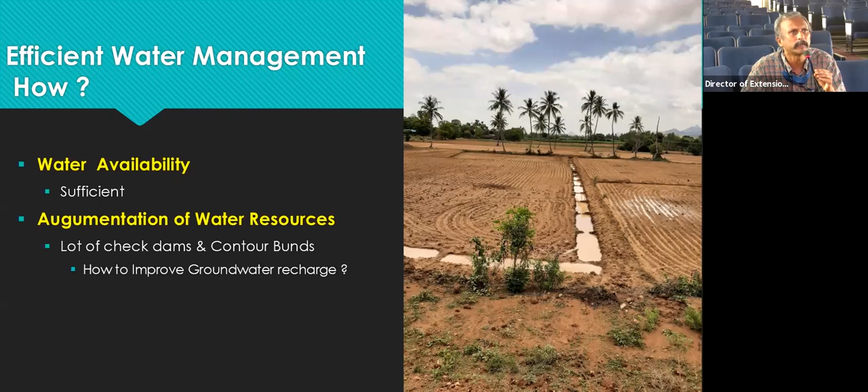Definitely it is not so, because of one very big reason: as soon as a check dam is constructed, initially it will have a very good infiltration capacity. But from the first rain onwards, in the upstream of the check dam, sediments get collected. With every rain, the sediments keep increasing in thickness, and the groundwater recharge potential and capacity gets tremendously reduced.

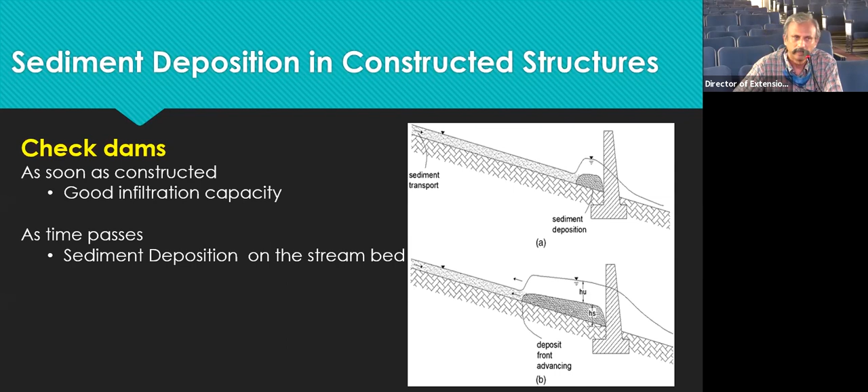In this kind of situation, scientists have found that in order to increase the infiltration capacity upstream of the check dams, we can dig open a trench, something like this in a check dam. If we are able to construct pits like this, then it will be very useful.

These kinds of pits will collect the water, and when water gets poured into these pits, the sediments settle down at the bottom of the pits. The vertical walls will not get sedimented, and through the vertical walls we will be able to have a very good infiltration capacity.

The same kind of principle can also be used in contour bunds. Trenches can be constructed like this, and here we have a vertical wall. Through the vertical wall, the sediments settle at the bottom, and through the vertical wall we are able to have very good infiltration, and groundwater recharge will be better.

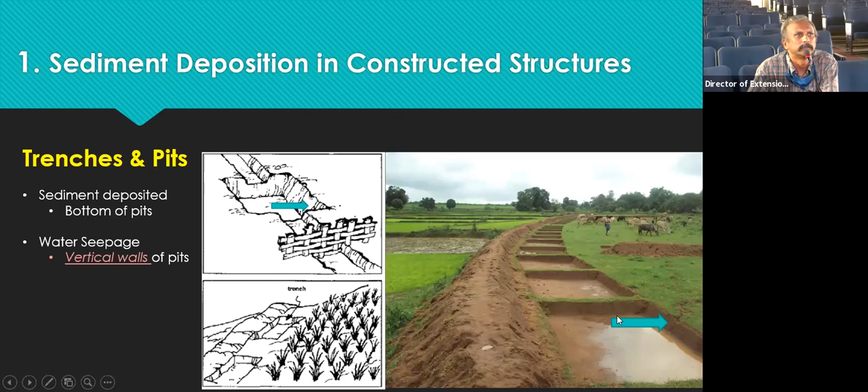As days pass by, the vertical walls of the pits and trenches would get eroded and become flattened like this, and in that situation the infiltration capacity would again get reduced. In order to maintain the verticality of the walls, it is recommended that the pits are filled with locally available gravels and boulders. If we fill them with locally available boulders and gravels, we can maintain the verticality of the walls and get very good groundwater recharge.

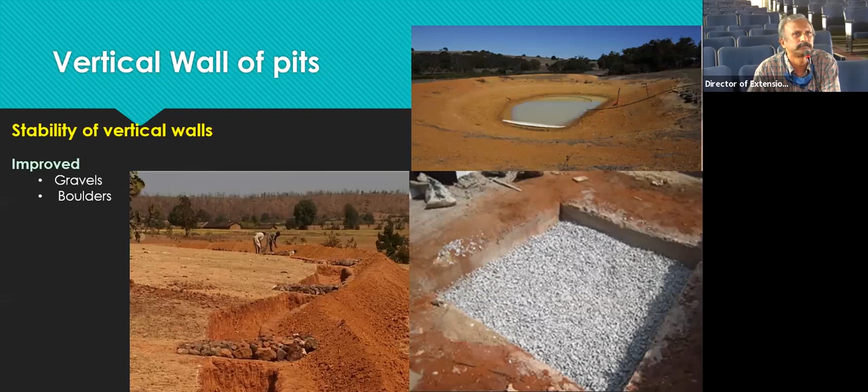In certain situations, wherever possible, in the upstream of the check dams we can fill with gravels like this. When we fill with gravels like this, the sedimentation process occurs over a larger area, and the sediments also settle on the gravels. Since the sedimentation gets distributed, the infiltration capacity of the stream bed will not get reduced very much.

You can also see here, when the bank of the stream is very steep and the soil is also highly erodible, in that kind of situation the geotextiles as seen in the image can be used. In that case, soil erosion can be very much reduced and sedimentation can be prevented.

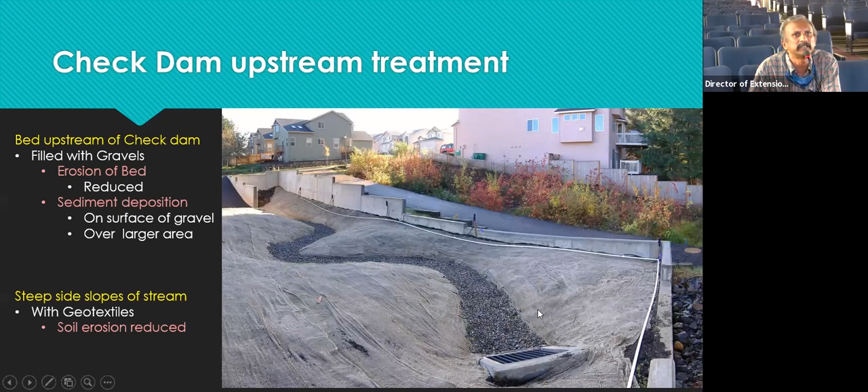Now I will talk specifically about different technologies recommended currently in micro irrigation. The first technology is drip irrigation with oxygation, which means supplying air to the root zone. The next technology is partial root zone drying in drip irrigation. The third is low pressure drip irrigation. And fourth, very interestingly, is crop demand estimation by cell phone. Our ordinary cell phones can be used to estimate crop demand or crop water requirement by downloading an app from Netafim. And lastly, automation. We will see each technology one by one.

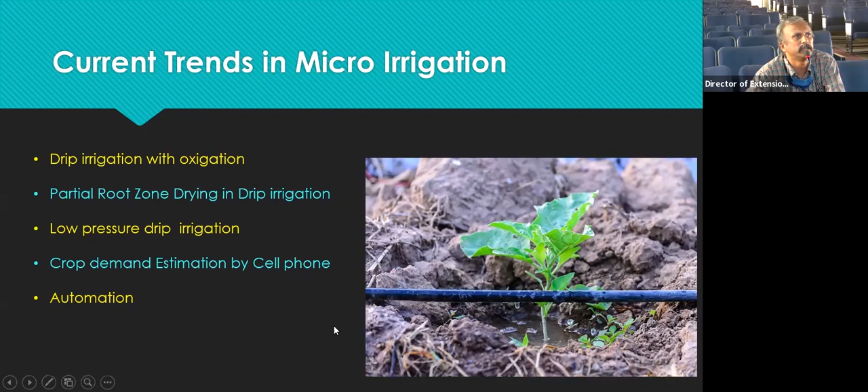In drip irrigation with oxygation, we supply oxygen to the root zone, particularly by using subsurface drip irrigation. Through subsurface drip irrigation, along with the irrigation water, we mix in air and send it to the root zone, and that process is called oxygation.

Because of doing so, what do we get? The crop yield has been found to be significantly increased, and we are able to get earlier harvest, and late season, off-season productions were also made possible. The root mass has been found to be increased, and because of the increased root mass, we get a very good nutrient uptake and nutrient use efficiency.

The microbial activity in the soil gets very much increased, and water use efficiency gets increased, and the salinity tolerance ability of the crop also gets very much increased.

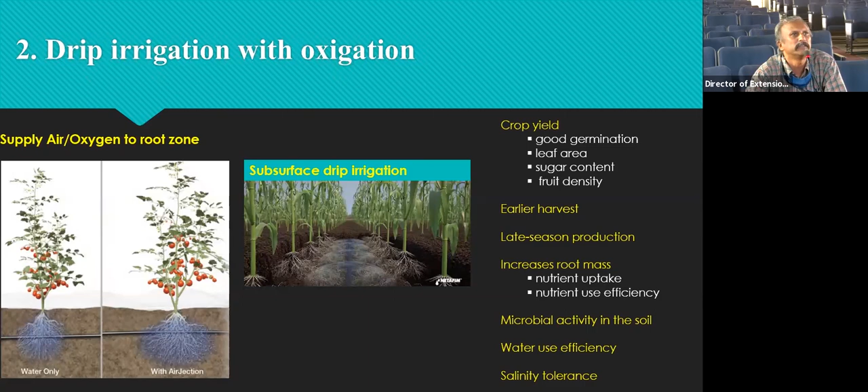So how do we add air or oxygen into the irrigation water? We all know that venturi is the normal accessory that is used for doing fertigation. So that accessory itself can be used for doing oxygation.

When we do oxygation with venturi, what we do is we just pass the water through the venturi, and we do not dip the inlet pipe into the fertilizer solution. We just keep the inlet pipe like this. It should not be placed over the ground. If it is placed over the ground, when water passes through the venturi, the soil particles will also get sucked in, and it will get joined with the stream.

So it should be placed something like this. So when water goes through the venturi, it will take air from the atmosphere, and it will get mixed with the irrigation water, and it will go to the system. Actually, one small problem with this venturi is that the air that gets mixed up with the irrigation water, the size of the bubbles will be larger.

So these bubbles would join together, and that air will get released in the air valves.

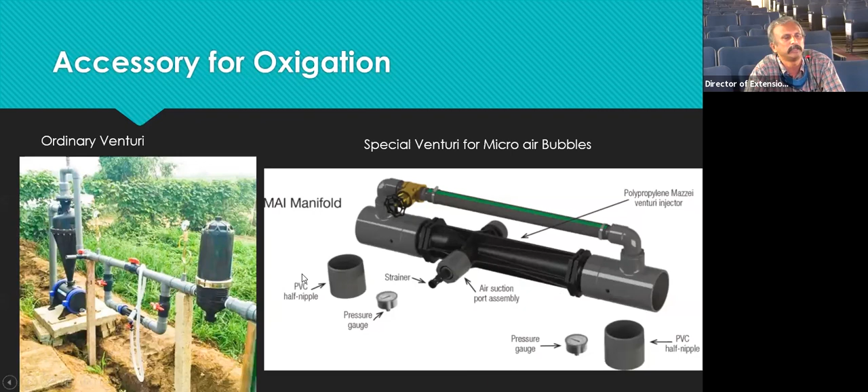And this can be used for oxygation. These two accessories can be used for oxygation. So when a farmer is using oxygation, he should also be a little careful.

In the control head, when we are adding air through the venturi, what will happen is when it goes to the field, for each submain, we will have one air valve that is known to all of us. So all the air we are adding to the irrigation water would get separated through the air valve and released.

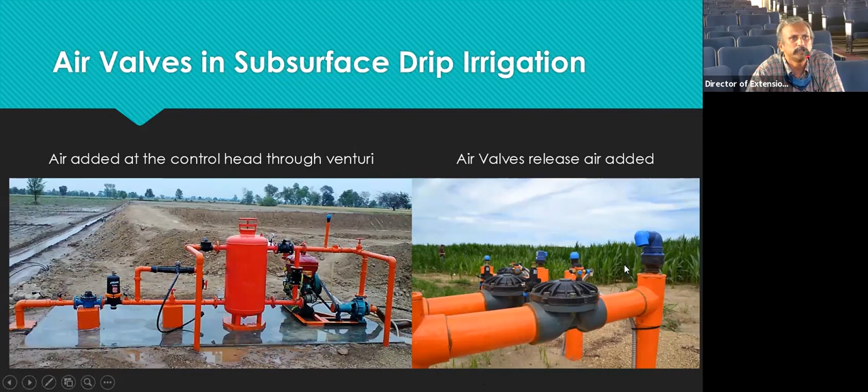So that should be prevented. In order to prevent air from getting released away, we should have the air valves in the flush line. This is the submain. At the end of the submain, in the subsurface drip irrigation, we will have a flush line, that is a PVC pipeline that will be installed. So we have to have our air valves in the flush line only, not in the submain.

If you have air valves in the flush line, what will happen is the air in the irrigation water would get released at this point after passing through the drippers. So that should be kept in mind.

And nowadays, due to the reduction in prices of plastics and so on, people are using this in greenhouses and similar setups. For every lateral also, one can use one venturi, or as seen in this figure, for 2 laterals, one venturi is kept, and when water passes through this venturi, air will be sucked inside and pass into the irrigation water, and oxygenation is done.

And people have found that if we maintain a pressure head loss or pressure head difference between inlet and outlet of the venturi around 5 meters, 0.5 kg between inlet and outlet, it adds up around 12% air by volume of water. This has been found to be sufficient to get a significant increase in yield.

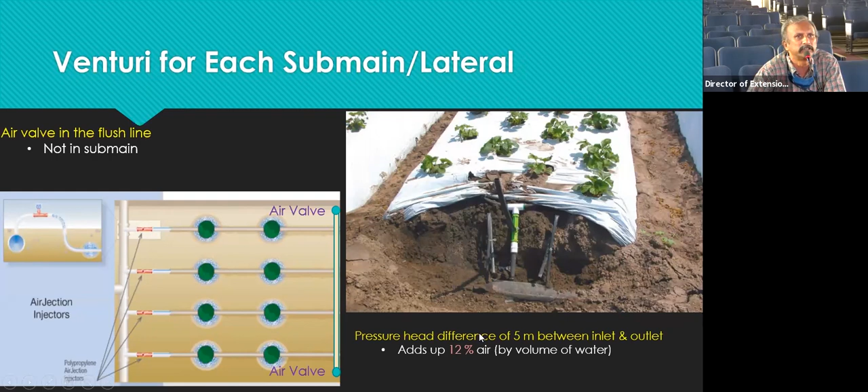Chemical methods can also be used for oxygation. The chemical recommended for doing oxygation is mixing a chemical called hydrogen peroxide with irrigation water. When we mix hydrogen peroxide in irrigation water, the dissolved oxygen in the irrigation water gets improved. And hydrogen peroxide nowadays is also a recommended chemical for removal of algae from drippers and pipes.

We all know that when we take water from surface sources like open wells, we will have a lot of clogging problems. So far, for removal of algae, sodium hypochlorite and calcium hypochlorite, that is bleaching powder, was recommended. Nowadays, for removal of algae, instead of bleaching powder, hydrogen peroxide is very much recommended, because it doesn't cause the environmental problems caused by bleaching powder and chemicals like that.

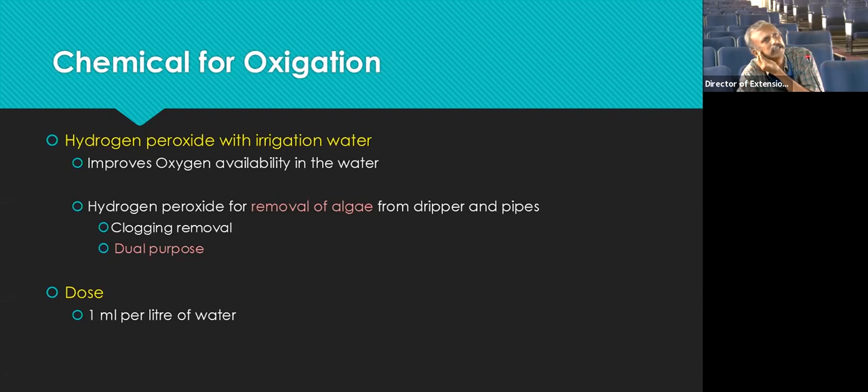So when we are using hydrogen peroxide, we can be sure of two purposes. One is clogging removal, and the other is oxygen availability. The dosage recommended for hydrogen peroxide mixing with irrigation water is 1 milliliter per liter of water. The next technology I will talk about now is partial root zone drying. What did scientists

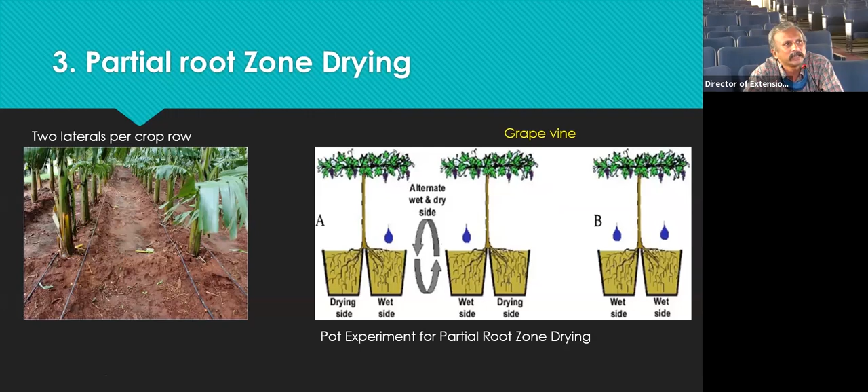So by doing partial root zone drying, what are all the benefits we get? We are able to train the plant to manage stress during drought conditions. It reduces the stomatal conductance. When the stomatal opening gets reduced, transpiration gets reduced. And also because of alternating between sides for irrigation, the nitrogen and phosphorus availability in the root zone gets improved. When nitrogen and phosphorus availability in the root zone gets improved, its uptake also gets improved.

So tremendous advantages have been proved by the scientists, and for almost all crops research is being done, and I am presenting one research result for you to understand. For banana crop, when 1 week was used as the switching interval between sides, scientists found that they could save 50% of water, and there was a yield reduction of only 8%. It should be kept in mind that when we use partial root zone drying, there will be a slight yield reduction, but the saving in water will be very high. So these kinds of methodologies can be recommended in places where water is scarce.

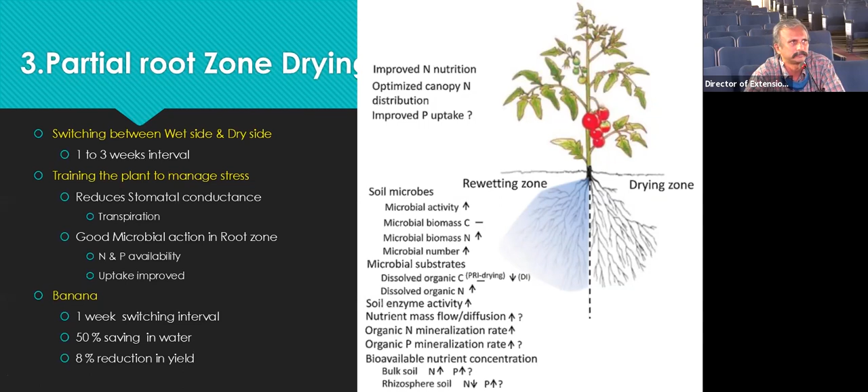The fourth technology we will talk about now is low pressure drip irrigation. Obviously low pressure drip irrigation means it will operate with a very low pressure. From the image you will be able to see that from the tanks itself we will be able to do drip irrigation. Tanks which are placed at a height of only 1 meter from the ground can be very well used in low pressure drip irrigation.

Low pressure drip irrigation can also be used without tanks by directly connecting the pump, but operating with very low pressure. You should also keep in mind that 1 meter of water column is very low pressure, but the normal drip irrigation systems that we are now adopting and recommending use 10 meters of water column.

10 meters of water column is equal to 1 kg pressure. 1 kg pressure is equivalent to 10 meters of water column. Even 1/10 of 1 kg of pressure is sufficient in a low pressure drip irrigation system.

So when one uses a low pressure drip irrigation system, the strength of the pipes and equipment used, and the thickness of the pipe, are all much less, so the cost is very less. Since low pressure is added to the water, power consumed is also less, so the operating cost is less.

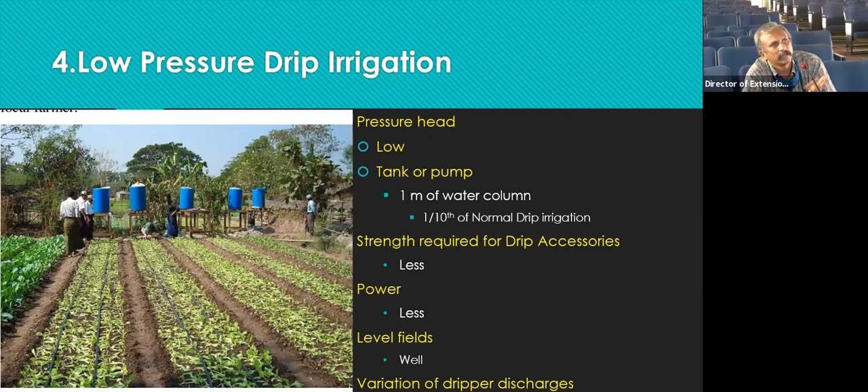And nowadays, solar systems are very much used. So integration of low pressure drip irrigation systems with solar systems is happening. Low pressure drip irrigation systems with solar systems can be very much recommended. And as I already said, in undulating lands, it should not be used.

One more problem with low pressure drip irrigation is clogging, because the water comes out with very low pressure and low velocity. Filtration has to be done carefully. If filtration is not done properly, clogging could be a problem. Wherever possible, larger discharge rate drippers should be used. If you have a 2 liter per hour dripper and a 4 liter per hour dripper, always go for the higher discharge rate dripper, because it will have a larger flow passage. So clogging will not be a problem in that case.

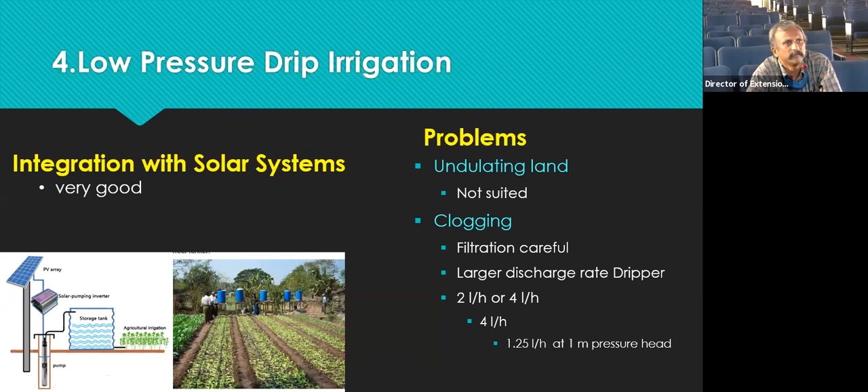Even if you are using a 4 liter per hour dripper, you will be getting only 1.25 liters per hour at 1 meter pressure head. Whenever we say 4 liters per hour, it means that this dripper will deliver 4 liters only when 10 meter pressure head is available at the dripper; otherwise you will get less. So in a low pressure drip irrigation system, even with a 4 liter per hour dripper, you will get very less discharge, but you can increase the irrigation time in order to have sufficient irrigation.

And fifth is the most interesting: a cell phone app for crop demand estimation. This is a very popular and simple formula for estimating evapotranspiration of any crop: ET of the crop is equal to Kc, the crop factor, into ETo. ETo means reference crop evapotranspiration. If we know these two factors, we can find the evapotranspiration of the crop, and then we will be able to irrigate that much.

The reference crop evapotranspiration is for a standard grass. To find it in foreign countries, farmers own meteorological stations; they measure wind speed, humidity, temperature and so on, and based on that calculate the evapotranspiration. But our farmers did not use this method, since it was not affordable or easy. Nowadays, remote sensing technology has improved to such an extent that you don't need a meteorological station in the farmer's field.

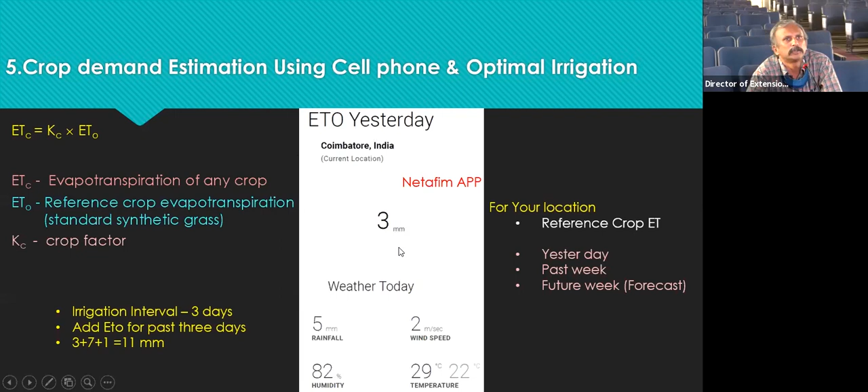And people are using this app around the world very well. Even in Tamil Nadu, many people are already using it. So this can be popularized among the farmers in order to improve optimal irrigation.

We should also know what is the minimum irrigation duration for row crops in drip irrigation. So in case of row crops, we adopt inline laterals. When inline laterals are used and a dripper is operated, the wetted circles would get formed like this. These wetted circles have to join together, and until that time irrigation should be done. We should get a continuous wetted strip, something like this. Only then irrigation should be stopped. This is called minimum irrigation duration.

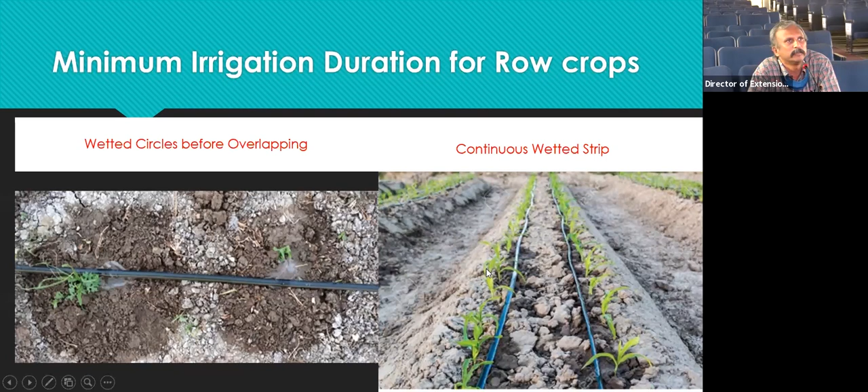When one lateral is used for 2 rows, irrigation should be sufficiently done to wet until the 2 rows of the crops. Sometimes for a single lateral we use 4 crop rows, even 5 also. So the minimum irrigation time should be such that the entire width gets wetted. So it is an easy job to know how minimum irrigation duration should be found.

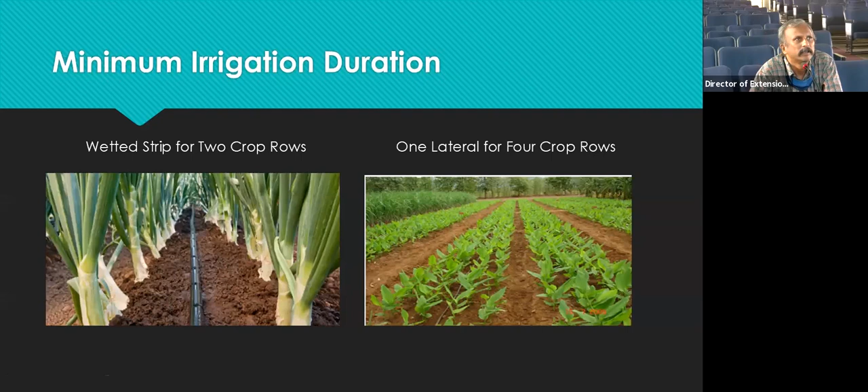But the maximum duration of irrigation is very important, and that should be known by the farmer. For finding maximum duration of irrigation, a farmer has to do a little field work. He should dig a small pit at the end of any lateral, at any place in the field. And if you look here, the dripper from the wall of the pit should be at half the normal spacing. Let us assume that the normal spacing between the drippers is 40 centimeter, half spacing is 20 centimeter. The dripper should be placed at 20 centimeter from the wall, and it should be operated.

And you should find out the time taken for the wetting front to reach the maximum rooting depth. That is the time until which you can do the maximum irrigation. If you irrigate beyond that time, you will be irrigating below the crop root zone. Then not only will you be wasting the water, all the nutrients you are adding with the irrigation water would get leached away, and you will not get the full benefit of using drip irrigation.

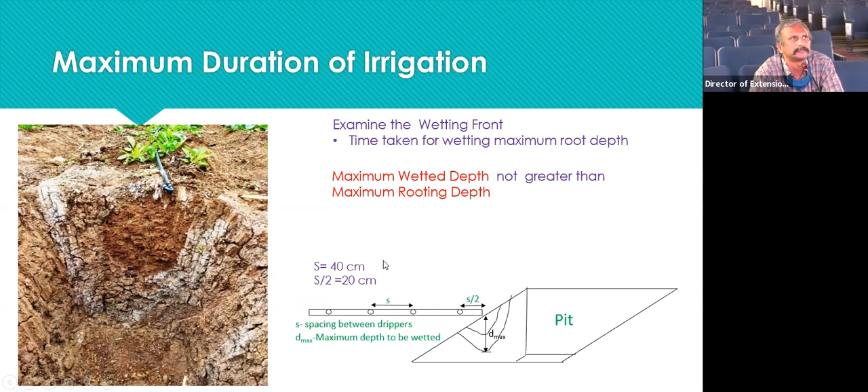Next we see drip irrigation for coconut. Scientists have found that for coconut, the most active roots which take water are at 1 to 1.5 meters from the trunk of the plant. So if we are able to make a trench like this and have our drippers discharging water only in the trench, then we will be using the water optimally and efficiently.

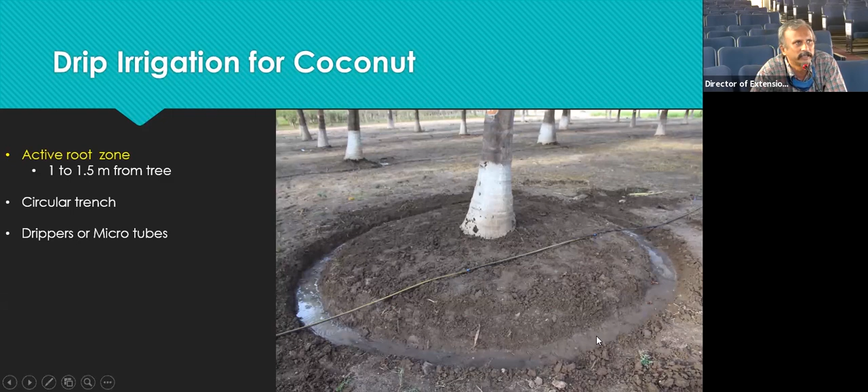Even some farmers who use tap can allow the water to get stagnated only in this trench. Then they will not be wasting too much water, and in this trench they can also place coir pith and organic mulches and things like that, and optimally manage the water for coconut.

Finally, I will introduce the technologies that are popularly used under automation of irrigation systems. What is automation of irrigation systems? It is operation of irrigation with minimum manual intervention. With minimum manual intervention, we can do irrigation nowadays. We can automate valves, pumps on and off can be done, fertigation can be done, filter washing can be automatically done. All these are possible with the improvement in electronics and computer technology.

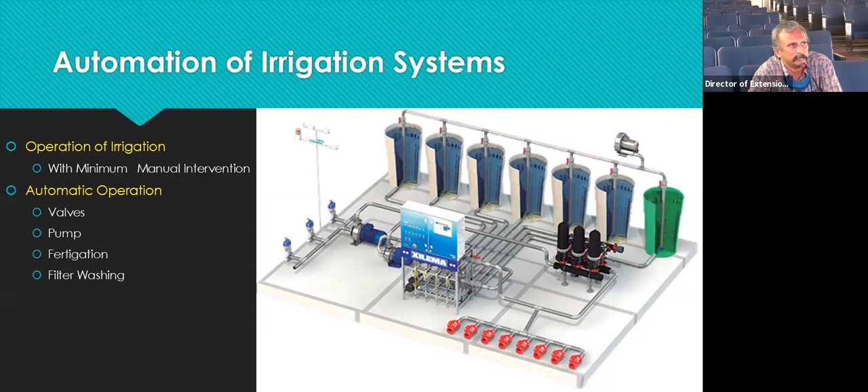Nowadays, with advanced automated fertigation systems, we find many channels, many tanks, in which for nitrogen a separate tank, for phosphorus a separate tank, for potash a separate tank, and micronutrients can be placed in a separate tank. Around 5 tanks can be placed, and the automated instrument will be able to take fertilizer solution in precisely measured quantities, and it will get injected into the irrigation water.

During that process, the electrical conductivity and pH can also be maintained by mixing with the acid. The pH can be maintained to a level around 5.5 and all will be optimal. These kinds of systems are very much used nowadays in greenhouses. Filter backwashing, as I already said, can be done with this kind of system.

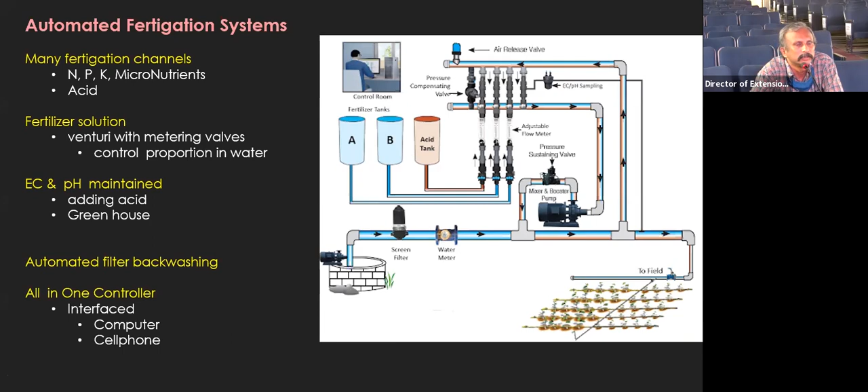All this automation is done by a single controller, and this controller gets interfaced with a computer, and the computer can also be interfaced with your cell phone. Since it can be interfaced with the cell phone, all this automation can be monitored, and commands can also be given from the cell phone. Those kinds of developments have occurred.

If you look at the irrigation valves in automation systems, irrigation valves will be in the field, while the controller and control head will be too far. If you want to control the irrigation valves in the field, we have to connect them with wires, and it is very difficult and a tedious process. Nowadays technology has grown for this also, and remote controlled valves from the control head have come.

There will be a remote terminal unit, and that remote terminal unit will be powered by a solar system itself. This is a remote controller, and this remote controller gets its instruction through radio waves from the controller. Here we have a radio wave receiver. So these kinds of systems have also come. These are all the most advanced systems available in the market now.

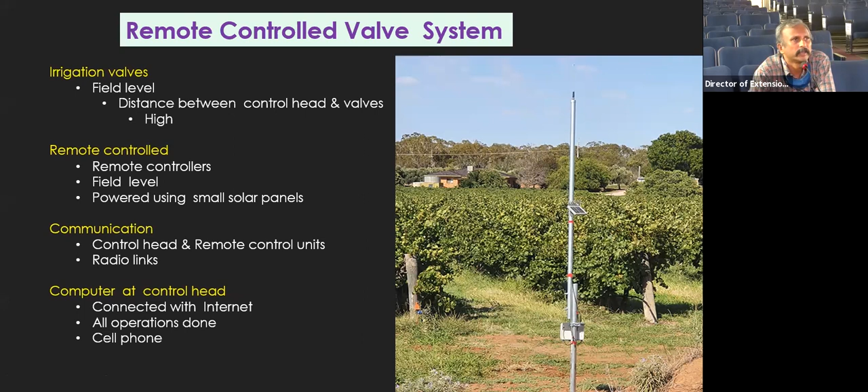Now I will introduce a few components in automation, so that when you look in the field, when people talk with you regarding automation, you will be able to understand what the technical person is talking about. All automation equipment will have a relay circuit.

All automation systems will have a simple relay circuit. In this, if you see, this is called the main circuit. In this main circuit, there is an AC motor, and this motor is connected with power, and this part is called the relay. This relay has a switching mechanism, and when this switch is put on, the AC motor will run. And here, this is called the relay circuit, and this relay circuit is also connected to this relay.

In this relay you are able to see one power source. The power source can be DC or AC. If DC is used, 12 volt DC will normally be used. If AC is used, 25 volt AC will be used using a transformer. You should keep in mind that this relay circuit works with low voltage. It will not cause any kind of electric shock at all.

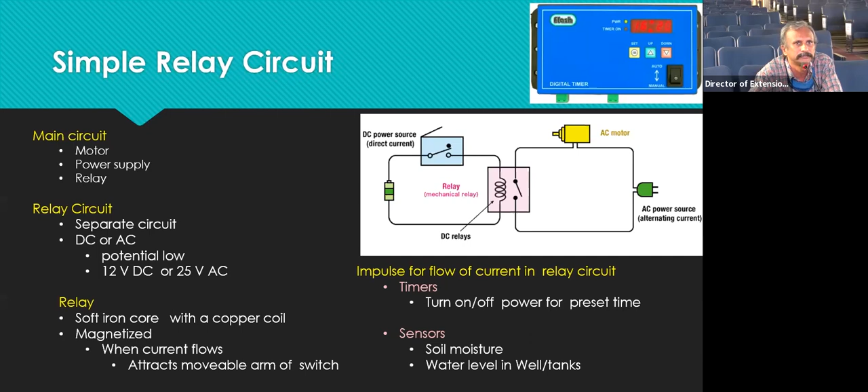One very big disadvantage of the electromechanical relay is that it has to move. Wherever there is movement like this, there will be wear and tear. Also, since high voltage current is passing through this circuit, when switching on and off an electric arc will be produced. Electric arc means high temperature. Because of high temperature, the contacts will get oxidized, and it will fail within a short time.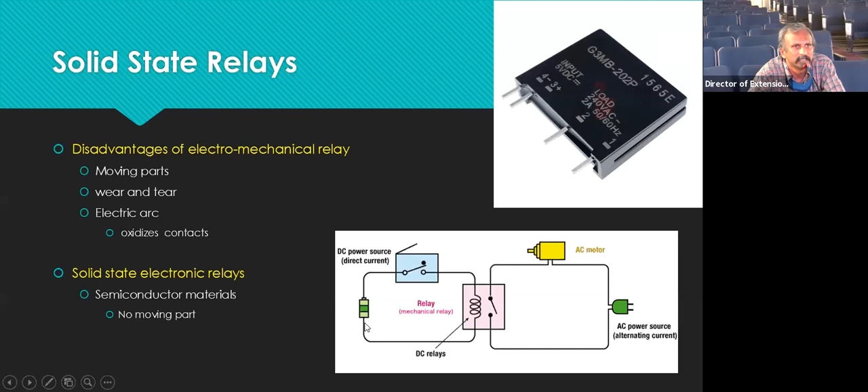So nowadays people have developed the solid state relay. Instead of electromechanical relays, solid state relays are used. In the solid state relay, you see four terminals, two here and two here. This can be placed here. Solid state relays are made of electronic, semiconductor materials, and there is no moving part inside, but it does the same process as the electromechanical relay. In many places, solid state relays are used.

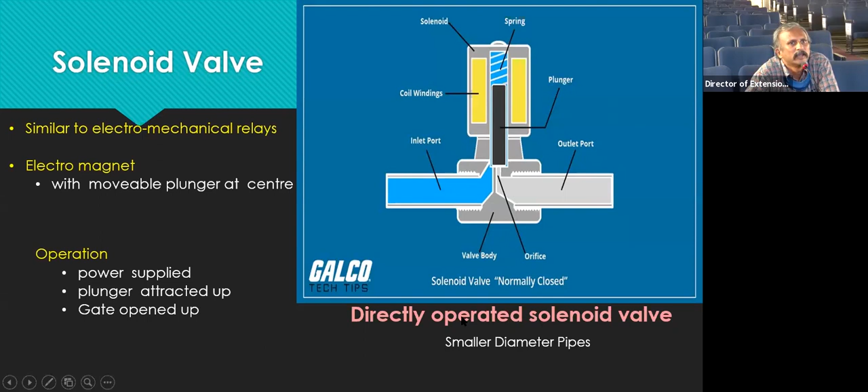When the solenoid valve is directly fitted with the pipeline, it is called a directly operated solenoid valve. Directly operated solenoid valves are used for smaller diameter pipes. In irrigation, this is one controller for one directly operated solenoid valve. This controller will control only one solenoid valve, and its operation can be easily programmed, such as on which days and for how long irrigation should be done. For instance, on Monday and Thursday, 8 a.m. to 10 a.m. irrigation must be done. If you program it like that, it will do it for you.

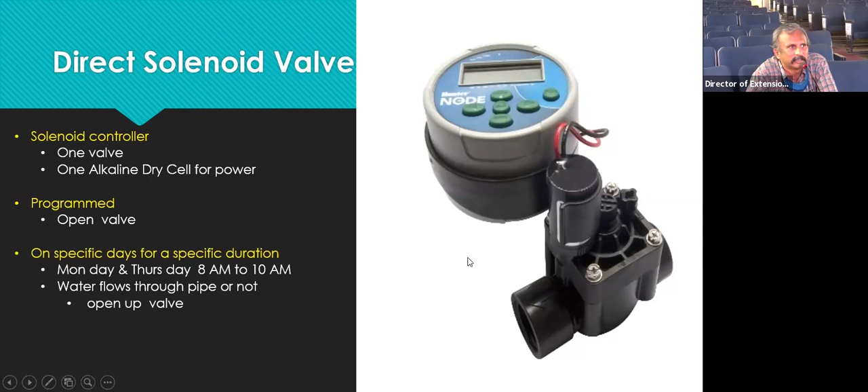But in this system, it doesn't care whether water goes through the pipe or not. On Monday and Thursday, 8 a.m. to 10 a.m., it will be opened regardless. So that is how these controllers work. As far as irrigation in farmer fields is concerned, directly operated solenoid valves are not much used. Only pilot operated solenoid valves are used.

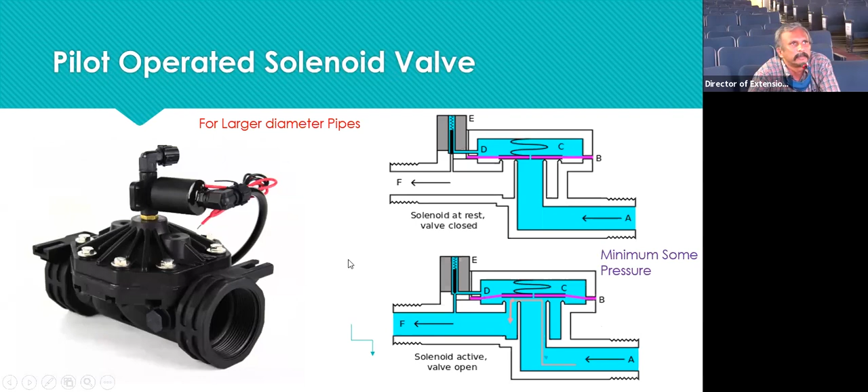So in order to operate these kind of valves, we need minimum pressure. Some pressure has to be there. Only then these valves will be opened, because only then it will be able to lift the diaphragm. So these valves, if you look in the field, many people would have used. They are called pilot operated solenoid valves.

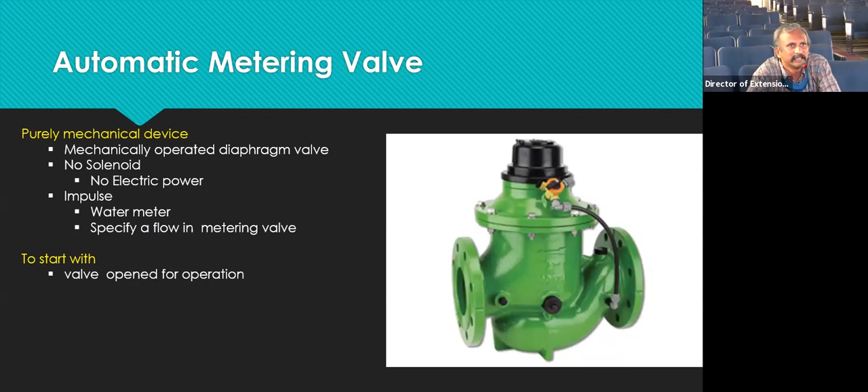So these kinds of automatic valves are standalone valves. They will operate only one valve at a time. So if we use overhead tanks, and if you operate these single valves with this kind of methodology, there will not be any problem. Even if all valves are closed, there will not be any pressure increase and pipe bursting and all will not happen. But in real situations, pumps exist in water line.

So if all the valves are closed, there will be possibility of bursting of pipes. So we need to go for higher technology level, and nowadays intelligent controllers are used. When all valves are closed, it will check up. If all valves are closed, it will automatically close the motor power supply also.

When one valve is opened, during that time, if the motor is not started also, then also problem. So when a valve is opened, it will also check up whether motor is running or not. If the motor is not running, it will also open up the motor.

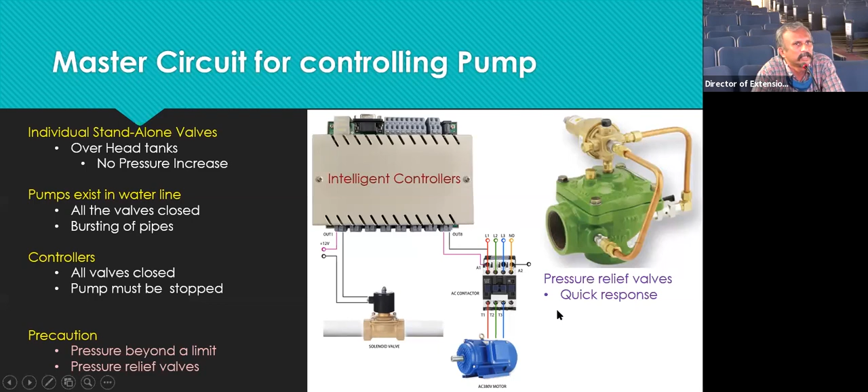So in case of automation, one more thing, pressure relief valves are also very much used. Sometimes if pressure goes beyond limit, the pressure relief valves will automatically open up and relieve the pressure, and they will have a quick response and things like that. These kind of valves are also used.

And we will see pressure management valves. There are two valves, pressure reducing valve and pressure sustaining valve. The pressure reducing valve will maintain a downstream pressure, whatever be the upstream condition. For a design pressure, let us say 1 kSc or 2 kSc, you don't need to operate this valve every time and adjust to get a design pressure. If you install this valve, this will automatically maintain a downstream pressure. That valve also does not need any electric power or electric controller and things like that.

There is another valve called pressure sustaining valve. Pressure sustaining valve will maintain upstream pressure. Whatever be the downstream pressure, it does not look into the downstream at all. It will look only at the upstream and the upstream pressure.

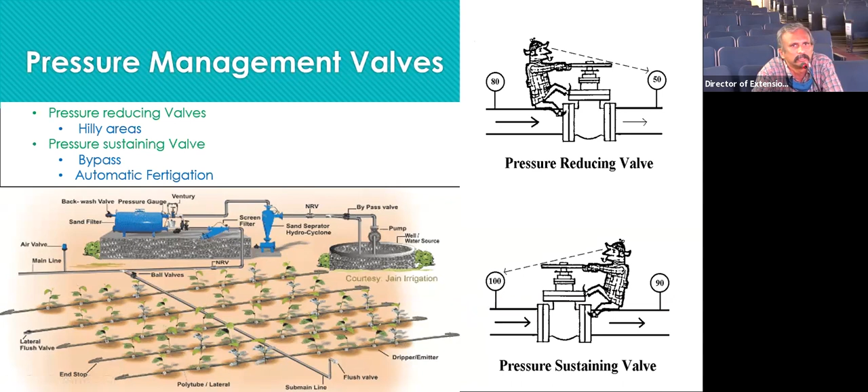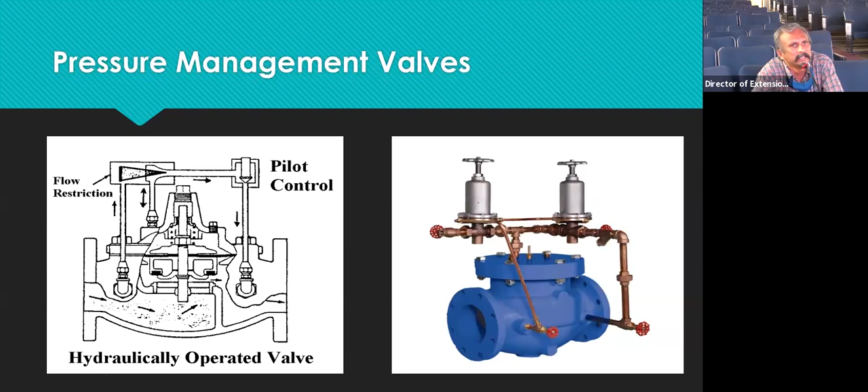This is a pressure management valve. Both pressure reducing valves and pressure sustaining valves look the same, but their operation is different. It will have two knobs. If you adjust these two knobs for your situation and fit it, you can forget it, and it will keep working to maintain the designed pressure either upstream or downstream.

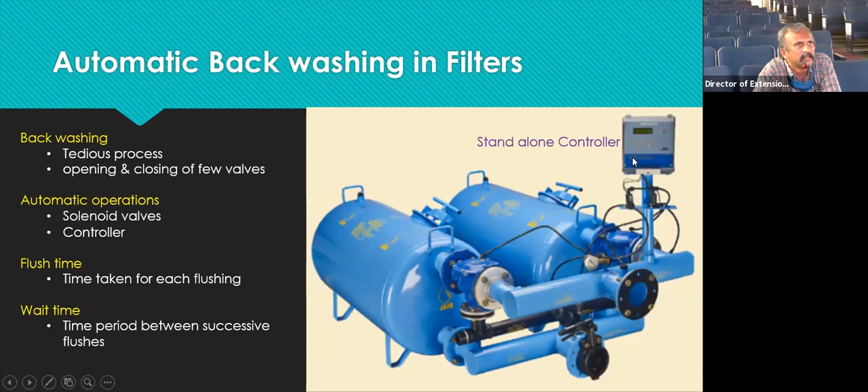As I said, automatic backwashing in filters is made possible by having a separate controller. The separate controller manages the solenoid valves, and here we can program for each flushing how much time the flushing operation should take, and at what time interval the next flushing should be done. These standalone controllers are also available in the market.

Lastly, soil moisture sensors are also used for automation. Four soil moisture sensors are normally used: the tensiometer, the resistivity sensor, and capacitance and time domain reflectometry sensors. The tensiometer and resistivity sensors are very much used because of their low cost. Capacitance and time domain reflectometry sensors are also used; they are very good and accurate, but since they are costly, most farmers do not use them. At present, these sensors are used only in research.

With tensiometer and resistivity sensors, you get data regarding soil moisture tension. If that kind of data is available to the farmer, it is very advantageous, in the sense the farmer does not need to consider what kind of soil the crop is grown in. For example, for sugarcane, if the optimal soil moisture tension data is 500 centimeters, irrigation should be done when that level is reached, whether the crop is grown in sand, loam, or clay. So that is the biggest advantage of soil moisture tension research data.

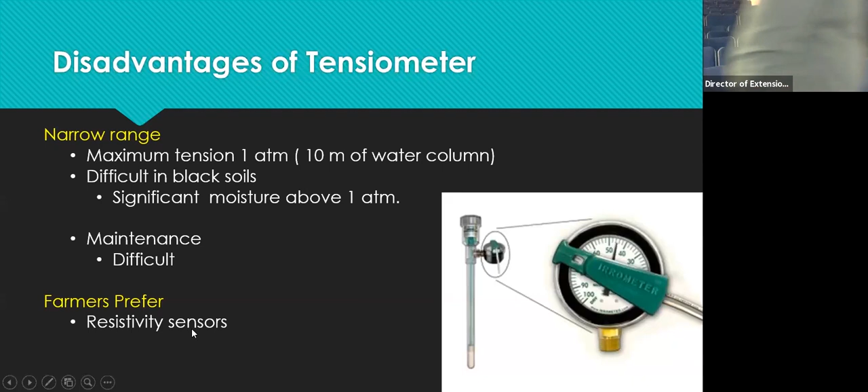The characteristic of resistivity sensors is that the resistance between electrodes is measured. Resistivity and soil moisture tension are proportional, so if you measure resistivity, you can estimate soil moisture. One disadvantage of resistivity sensors is that if the contact area between soil and sensor varies, resistance and resistivity will also vary. There are also possibilities of air pockets forming between electrodes and soil, which affects observations. Also, in saline soils and during fertigation, the ionic atmosphere in the soil affects resistivity, which also affects observations. These are some of the disadvantages of the resistance sensor.

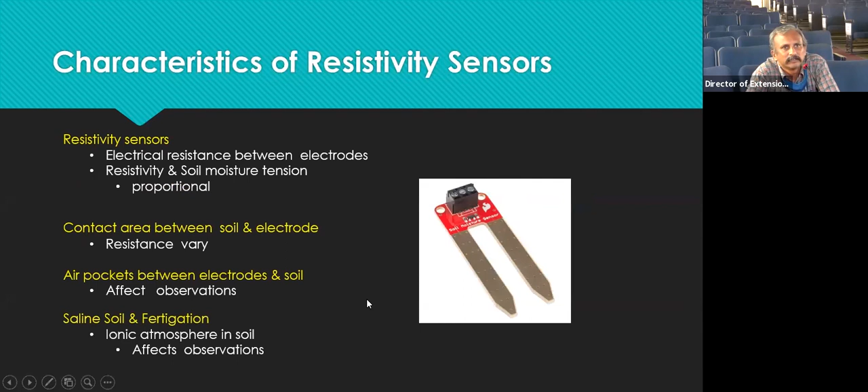So people developed another sensor called the gypsum block resistivity sensor. With this sensor, electrodes are placed in a gypsum block, which has very good buffering capacity, so the effect of salinity is reduced. In saline soils, regular resistivity sensors have a lot of errors, but gypsum block resistivity sensors reduce errors due to salinity. One small problem is that the gypsum erodes and dissipates over time, so it may need replacement every 3 to 5 years.

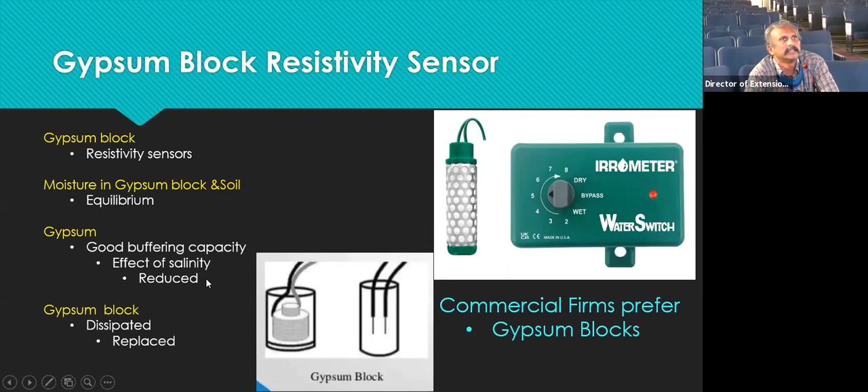With a tensiometer, one valve can be controlled, and with two tensiometers we can also do irrigation scheduling. One tensiometer is placed in the effective root zone. When soil moisture tension goes above a certain level, which can be adjusted with a knob, we can fix at what soil moisture tension irrigation should start. We should also know when irrigation should stop, and that is taken care of by another tensiometer: when the area gets sufficiently wetted, it sends a signal to the controller to stop the valve.

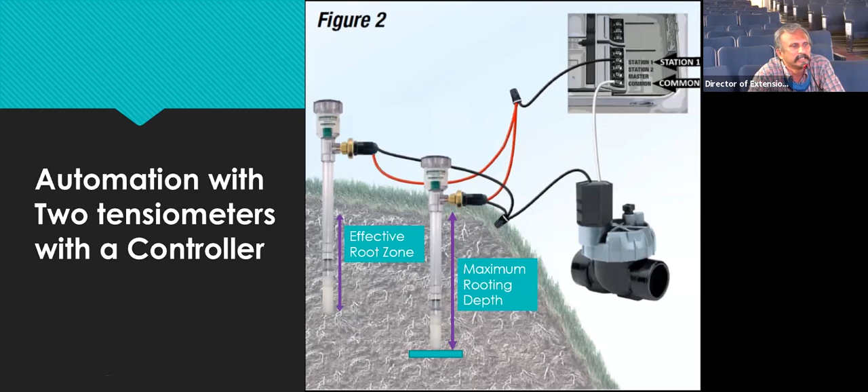So these are some of the advancements happening around the world. With that, I conclude my lecture. I hope I have given sufficient information on this subject, and I expect feedback and any questions from the trainees and participants. Thank you.